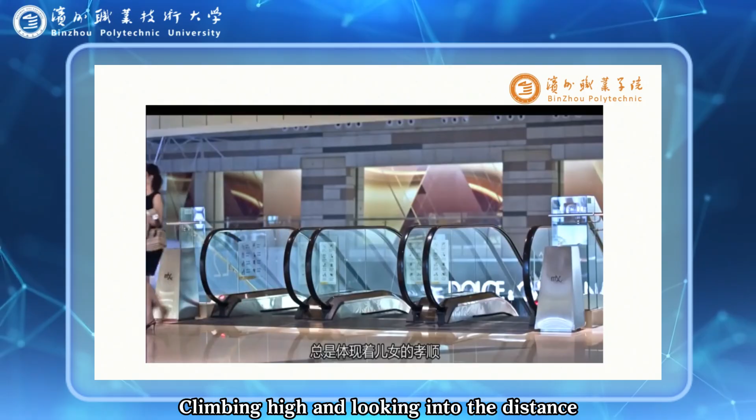Delicious meals always fill you with happiness. The joy of the amusement park grows along with the flowers. Going out for shopping reflects the children's filial devotion. Climbing high and looking into the distance, everyone experiences the civility of the modern city.

Did you know that the gas cylinders used in cooking, the amusement park rides that bring us joy, and the elevators that make our lives more convenient all fall under the category of special equipment? So, what exactly is special equipment?

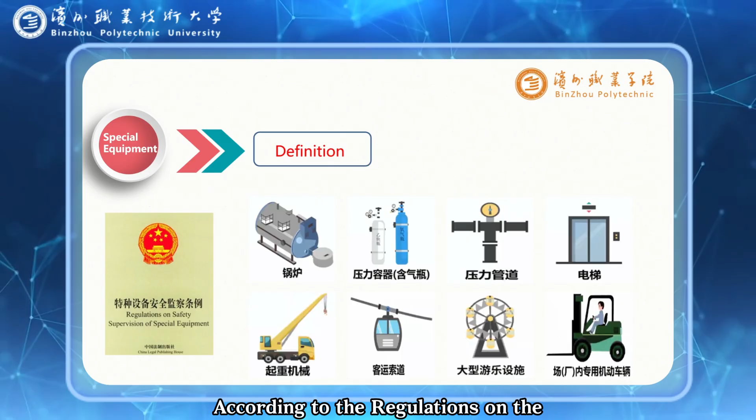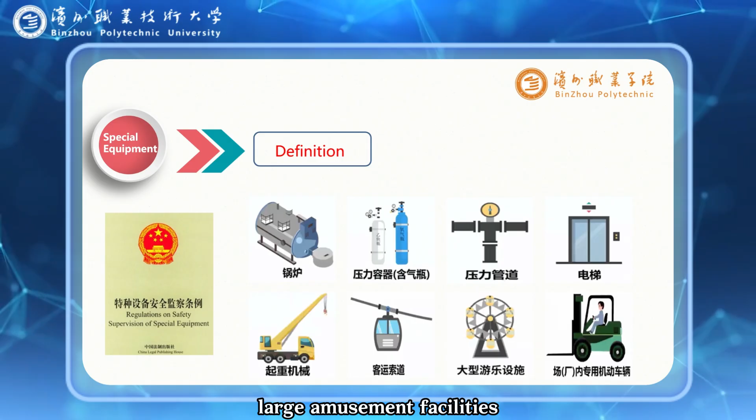According to the regulations on the safety supervision of special equipment, special equipment refers to boilers, pressure vessels including gas cylinders, pressure pipelines, elevators, lifting machinery, passenger ropeways, large amusement facilities, and special-purpose motor vehicles used within sites or factories that involve life safety and pose significant risks.

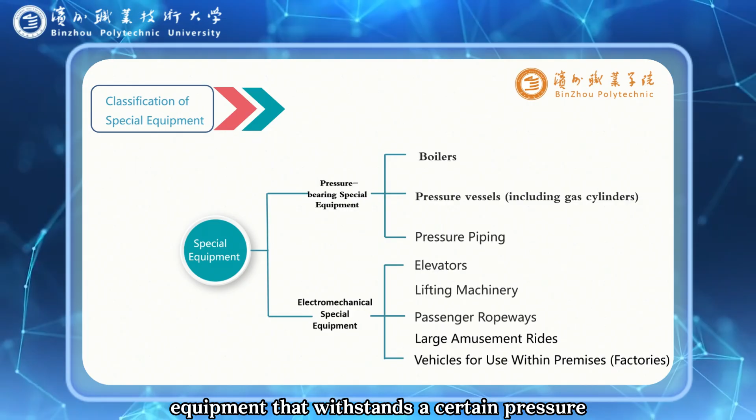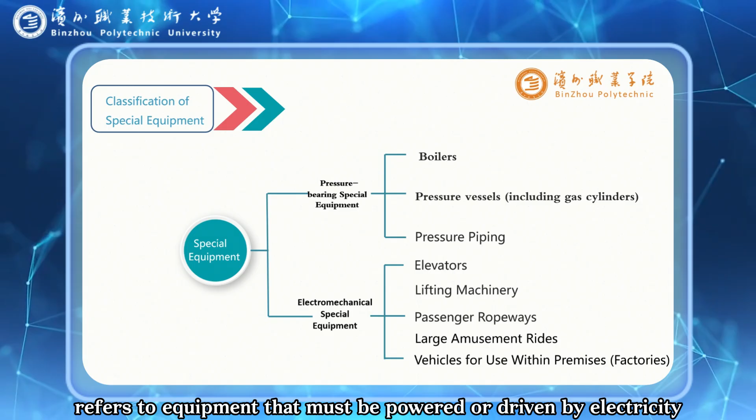Based on their primary operational characteristics, special equipment can be classified into pressure-bearing special equipment and electromechanical special equipment. Pressure-bearing special equipment refers to sealed or tubular equipment that withstands a certain pressure, including boilers, pressure vessels including gas cylinders, and pressure piping. Electromechanical special equipment refers to equipment that must be powered or driven by electricity, including elevators, lifting machinery, large amusement facilities, passenger ropeways, and on-site factory motor vehicles.

Please take a close look. What are the characteristics of this special equipment? We find that some operate under high temperatures and pressures, some run at high altitudes or high speeds, and some contain flammable, explosive, or toxic substances.

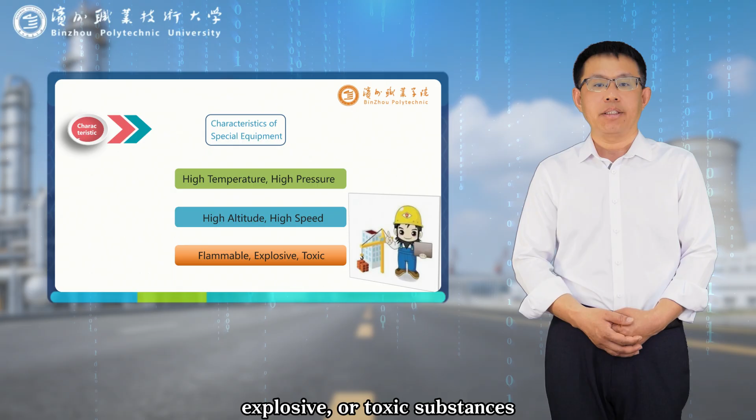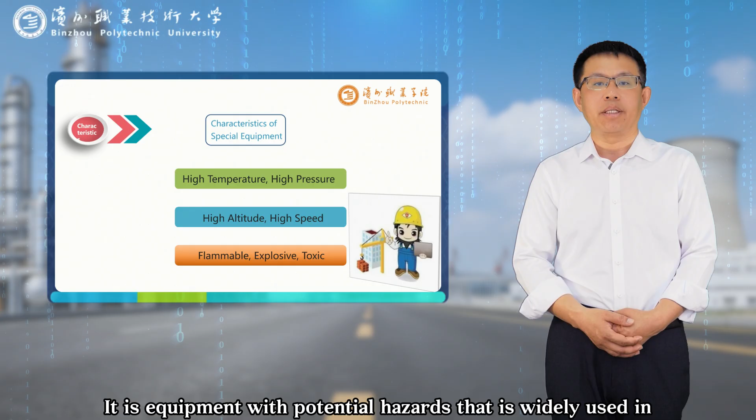Therefore, special equipment is characterized by high temperatures, high pressures, high altitudes, high speeds, and the presence of flammable, explosive, or toxic substances. It is equipment with potential hazards that is widely used in people's production and daily lives. Once an accident occurs, it can result in serious personal injuries and significant property damage.

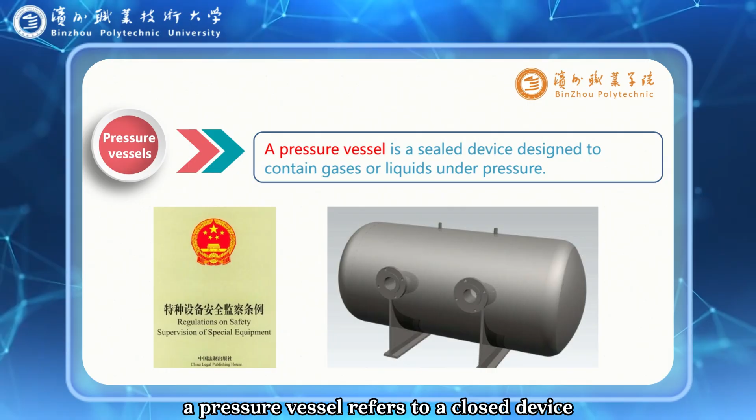From the above discussion, we have learned that pressure vessels are classified as special equipment. So, what exactly is a pressure vessel? According to the regulations on the safety supervision of special equipment, a pressure vessel refers to a closed device designed to contain gases or liquids under a certain pressure.

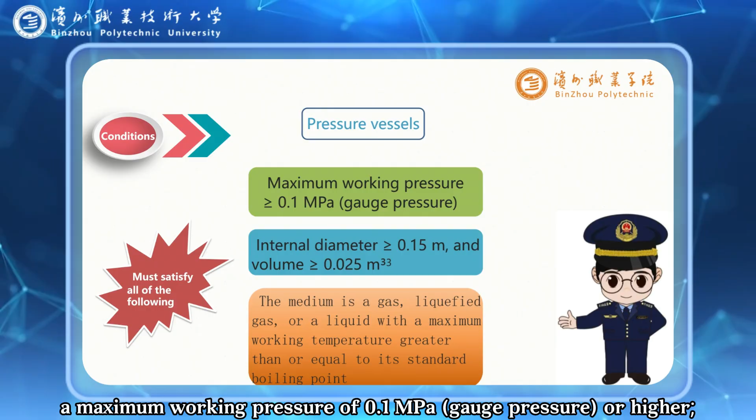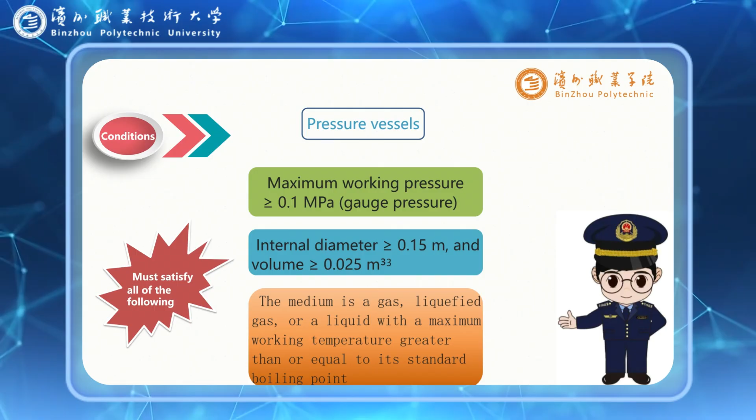Generally, a pressure vessel is defined as a vessel that meets all of the following conditions: a maximum working pressure of 0.1 megapascal gauge pressure or higher, an internal diameter of 0.15 meter or greater, a volume of 0.025 cubic meter or greater, and a medium consisting of gas, liquefied gas, or a liquid with a maximum working temperature equal to or higher than its standard boiling point.

It is important to note that the design, manufacture, welding, assembly installation, modification, maintenance, use, and inspection of pressure vessels must strictly comply with the provisions of the technical regulations for the safety supervision of fixed pressure vessels.

Pressure vessels are required in chemical production processes to store, process, and transport large quantities of materials. Due to differences in the state of the materials, their physical and chemical properties, and the process methods employed, a wide variety of pressure vessels are used. To facilitate safety supervision and management, pressure vessels are classified based on their working pressure, operating principles, and the nature and severity of their hazards.

First, pressure vessels are classified into 4 categories based on their working pressure: low pressure, medium pressure, high pressure, and ultra-high pressure. Low pressure, designation L: 0.1 megapascal is less than or equal to P and less than 1.6 megapascals.

Medium pressure, designation M: 1.6 megapascals is less than or equal to P and less than 10 megapascals. High pressure, designation H: 10 megapascals is less than or equal to P and less than 100 megapascals.

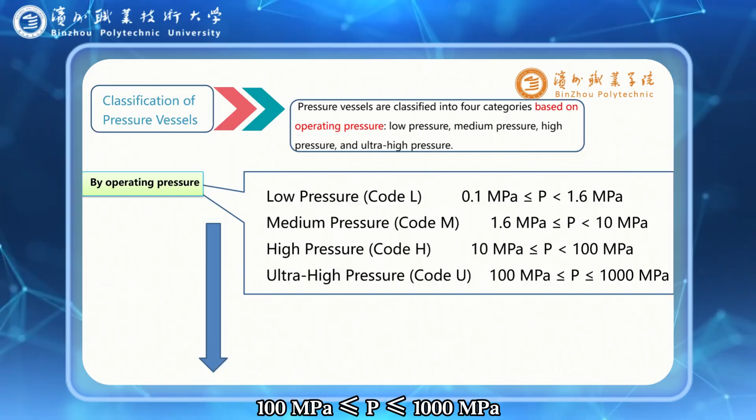Ultra high pressure, designation U: 100 megapascals is less than or equal to P, which is less than or equal to 1000 megapascals. Second, based on their functional principles in production processes, pressure vessels are classified into reaction vessels, heat exchange vessels, separation vessels, and storage vessels.

Reaction vessels, code R: pressure vessels primarily used to facilitate physical and chemical reactions of the medium. Examples include reactors, reaction kettles, decomposition towers, polymerization kettles, high-pressure kettles, ultra-high-pressure kettles, synthesis towers, copper washing towers, conversion furnaces, cooking kettles, rotary and spherical digesters, autoclaves, and gas generators.

Heat exchange vessels, code E: pressure vessels primarily used to facilitate heat exchange between media. Examples include shell and tube waste heat boilers, heat exchangers, coolers, condensers, evaporators, heaters, sterilizers, dyeing vats, steam frying kettles, preheating kettles, steam dehydration machines, electric steam generators, and water jackets for gas generators.

Separation vessels, code S: pressure vessels primarily used to achieve fluid pressure equilibrium and gas purification and separation. Examples include separators, filters, oil collectors, buffers, scrubbers, absorption towers, drying towers, steam distributors, and deaerators.

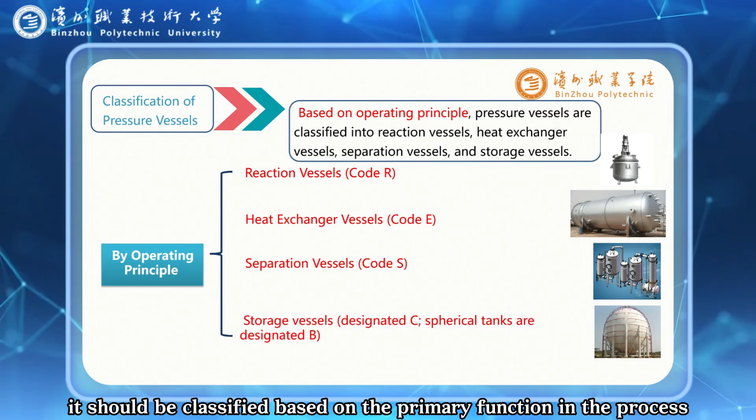If a single pressure vessel performs 2 or more process functions simultaneously, it should be classified based on the primary function in the process. Third, pressure vessels are classified into Class 1, Class 2, and Class 3 based on their level of danger and hazard.

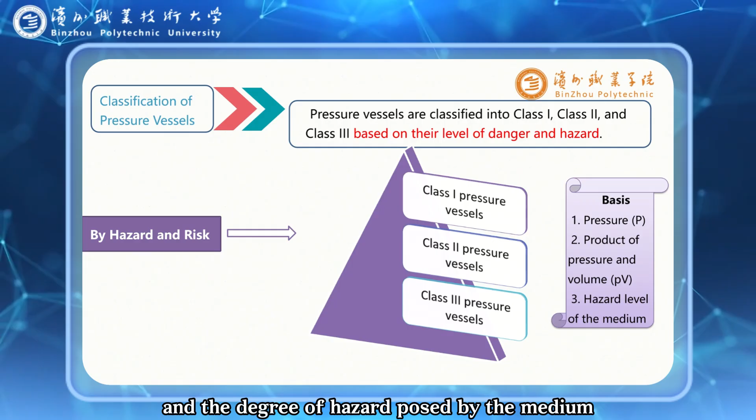The basis for this classification is pressure P, the product of pressure and volume PV, and the degree of hazard posed by the medium. Class 1 pressure vessels: low-pressure vessels containing non-flammable or non-toxic media, low-pressure separation vessels, and heat exchange vessels containing flammable or toxic media.

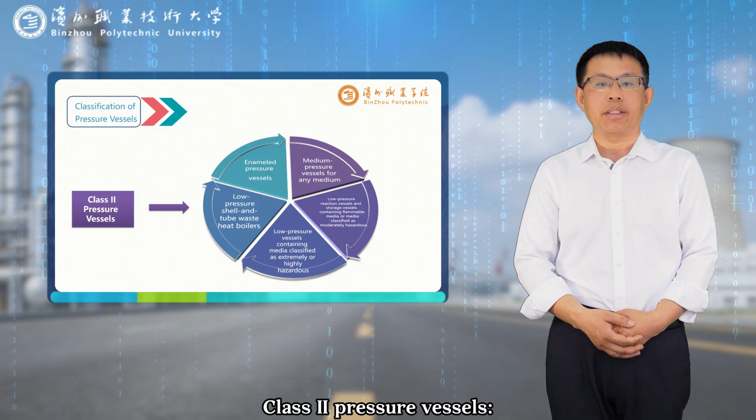Class 2 pressure vessels: medium pressure vessels containing any medium, low-pressure reaction vessels, and storage vessels containing flammable media or media with moderate toxicity.

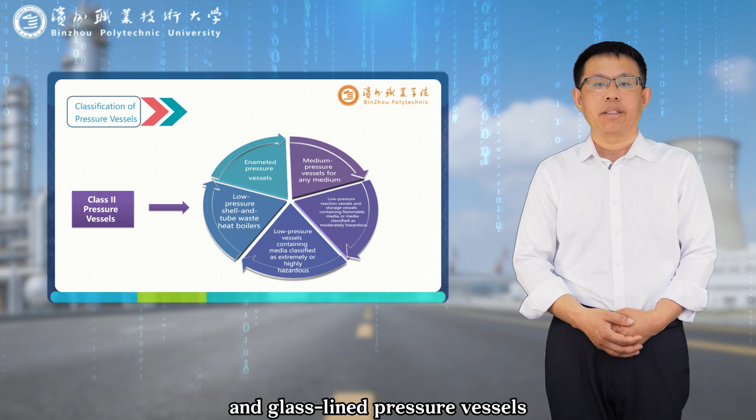Low-pressure vessels containing media with extreme or high toxicity, low-pressure shell and tube waste heat boilers, and glass-lined pressure vessels are also Class 2. Class 3 pressure vessels:

Medium pressure vessels containing media with extreme or high toxicity, and low-pressure vessels with a PV design, pressure multiplied by volume, greater than or equal to 0.2 megapascal cubic meters.

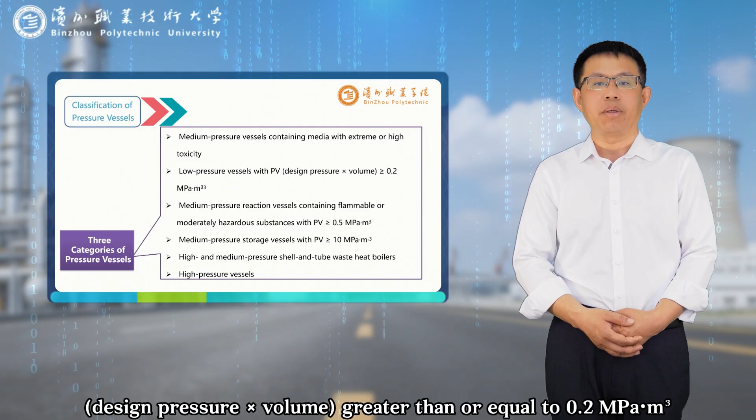Medium pressure reaction vessels containing flammable media or media with moderate toxicity and a PV greater than or equal to 0.5 megapascal cubic meters. Medium pressure storage vessels with a PV greater than or equal to 10 megapascal cubic meters.

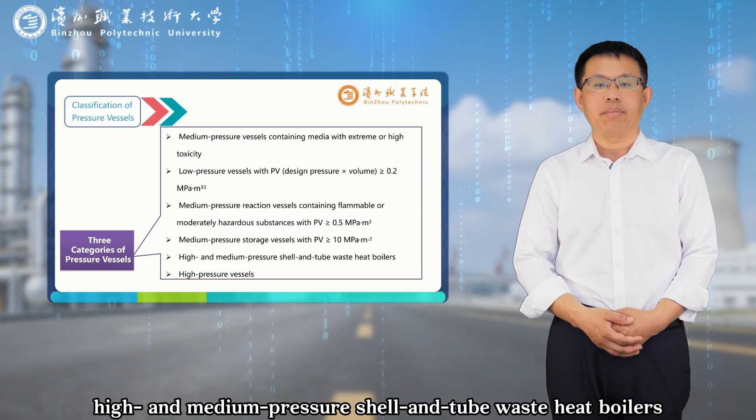High and medium pressure shell and tube waste heat boilers, and high pressure vessels, are also Class 3. In this class, we learned about special equipment, its characteristics, and the classification of pressure vessels.

That concludes this section. For your reflection after class: why do containers holding toxic, flammable, or explosive substances automatically fall into a higher classification category? Please explain this in relation to safety management requirements.